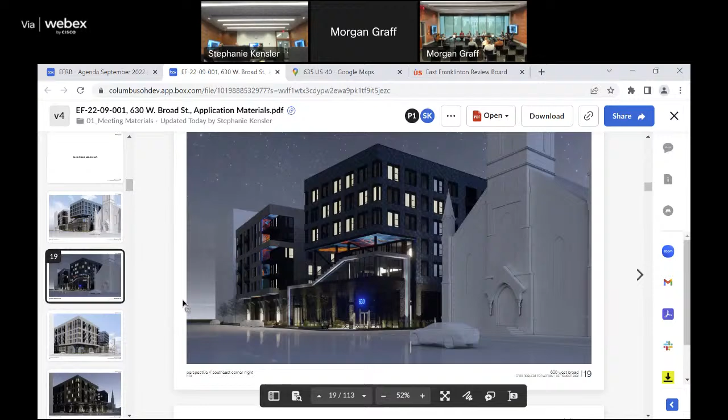The primary design changes to the application since the July 2022 review include varied the height of the parapet, added large format brick to the base of the building, increased mural opportunities for the garage screening, soffits, and balcony cuts along West Broad Street, added more balconies on the west facade, redesigned the southeast corner entry, adjusted the size of the townhomes and relocated balconies out of the right-of-way, and deepened the commercial spaces and the residential lobby.

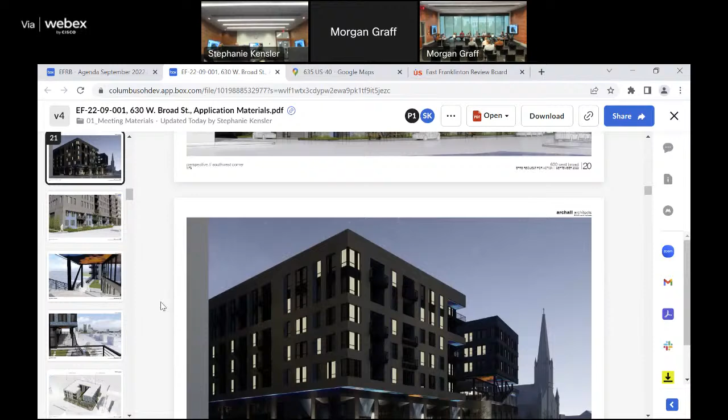The applicant will return to review and approval of landscaping, lighting, and signage and graphics. The submittal includes existing condition photos, site plans, floor plans, elevations, perspectives, and material information.

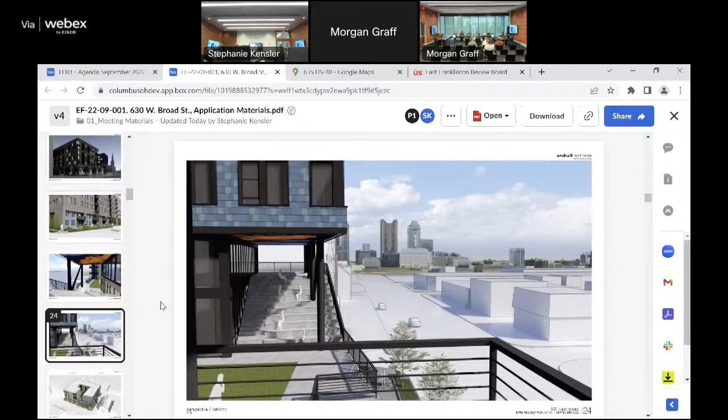The proposal is generally consistent with the East Franklinton Creative Community District Plan, and the uses are permitted. The plan suggests that a wide range of architectural styles are appropriate for East Franklinton, with a preference for contemporary building design and materials, and that new construction should be integrated into the surrounding neighborhood. The proposal is consistent with these guidelines.

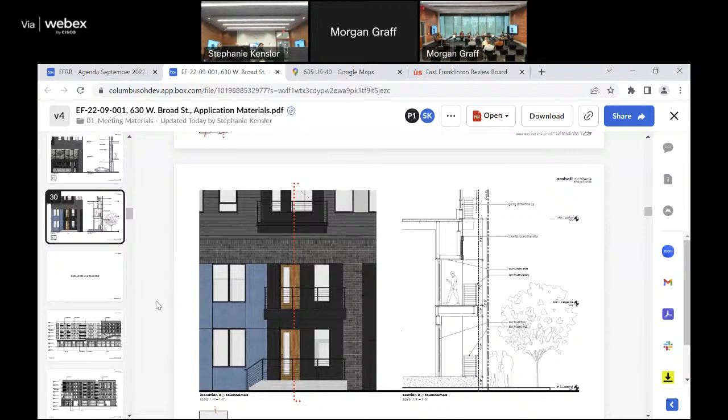The plan also recommends that buildings have a consistent level of detailing on all 4 sides and contribute to street activity. The proposal is generally consistent with this recommendation, with the exception of the North Grove Street elevation on the ground floor. Further, preservation of the existing buildings is encouraged where possible.

The applicant is proposing to demolish all of the buildings on site. However, staff notes that the buildings, while historic, are not eligible for a historic register due to being heavily modified over time. Finally, the plan recommends full height screening of all roof and ground mounted mechanical, which is not included at this time.

Staff is generally supportive of the proposal, but recommends the applicant incorporate additional activation along the North Grove Street frontage and ensure that all roof and ground mounted mechanical are screened according to the plan recommendations. If approved, the board would be approving the following code development standard modification.

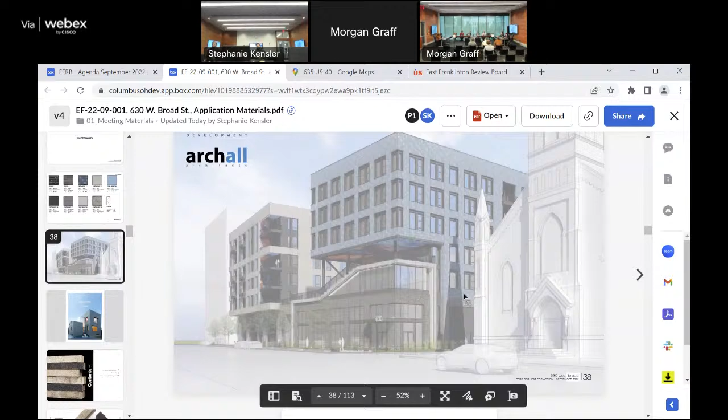A height modification to allow an increase in height from 60 foot to 88 foot 8 inches, an increase of 28 foot 8 inches. Staff's recommending conditional approval, with the conditions being the applicant to return for approval of landscaping and lighting, as well as incorporate additional activation along North Grove Street frontage and screening of the roof and ground mounted mechanical in accordance with the plan.

Thank you. Any questions for staff?

Hearing none, will the applicant step forward, please?

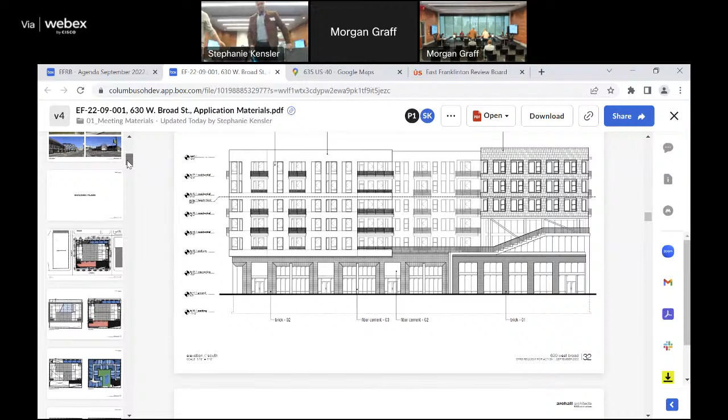State your names for the record. Grant Alvin. Brad Parrish. Do you swear or affirm that the testimony you're about to give is true and accurate to the best of your knowledge and belief? I do.

Proceed, the floor is yours.

So this is our fourth time with the group here. We've received great feedback along the way here, and we just want to continue to push the design for this area.

We focused heavily on this southeast corner here to really tie in that corner and that entry feature, which would be the main lobby space to the development.

You can also see by this initial render, we've added opportunities for graphics that we will come back and really show what they are. But we wanted to really activate multiple faces of the building vertically, the horizontal surfaces.

The materiality, I do have hard samples here of all the materials. Again, we're looking at a darker, black brick base on it, and all this materials in the back of your package. But I think the keynote material that we're looking to look at is this terracotta tile that comes in a different sort of shades of color and really gives a lot of texture and color to the building.

So this is a product that has been similar, if you're familiar with the White Castle corporate headquarters, the white, although this is just in color at this time. So it's a very high quality product. Again, I think all the materials that we have selected are high quality and give a project that can give longevity to the building facades.

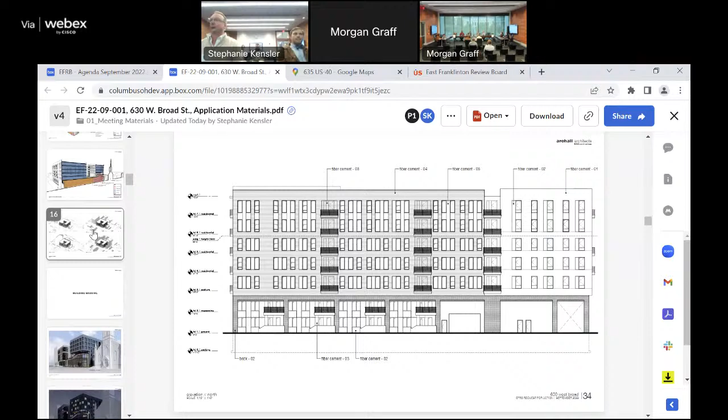So I think that's kind of a big picture highlight of what we've talked about. We showed the sun studies in version 2, as well as the 60-foot line showing that variance on our elevation. If you don't have further comments, I'll open it up to questions. All right, questions for the applicant?

So the other sun study, the winter one, I did not see that come through. They're both on there, on the same page—summer's on top and winter's on the bottom. Before you had all seasons. We had all seasons and then responded back. Not seasons, but months—it was all July but different times of day.

So the bottom is the winter. Again, my purpose for asking was related to the project we approved off of Gay Street, which hasn't come in for final authorization yet. Correct. I was hoping the rest of the board that wasn't part of that process would know there's a proposal there for a chapel and another building.

And again, related to the height increase—at the regulated 60 feet, there's going to be a shadow cast on that site because of the orientation of the building. If we approve more height, that's going to increase the shadow, especially in the winter. I wanted everyone to know that, because it's part of the decision making. You can see from 2 PM in the winter that facade is in shadow, so it will have an impact in the winter.

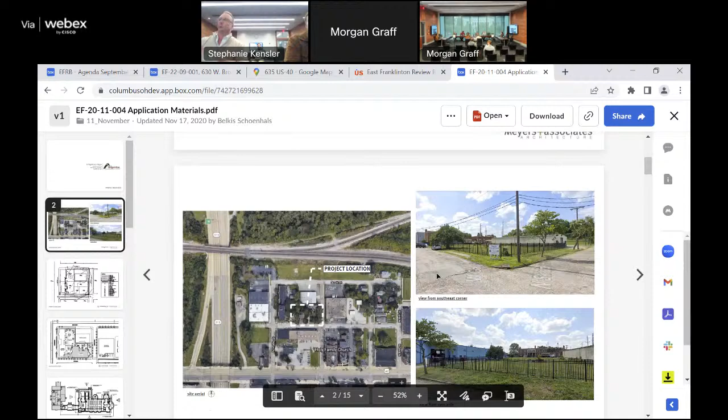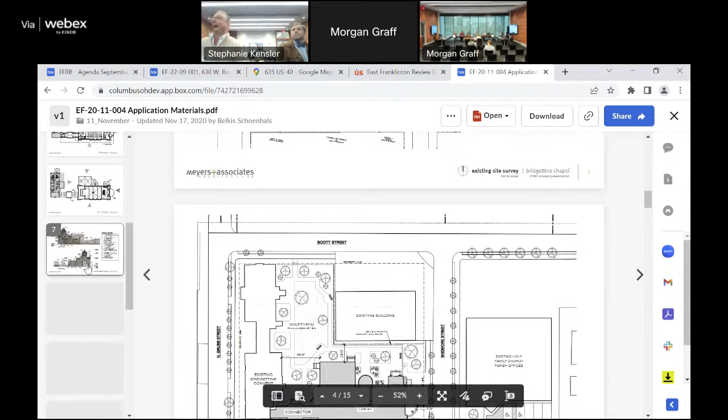Yeah, I like that gesture you did—I think that helps, that dialogue with that project. But I just want to be sensitive about increasing shadows because we may allow for increased height, and that's a decision we have to make. Again, this is an urban neighborhood—there's still going to be probably more tall buildings in East Franklinton, so just something to consider.

I had another question. Should we just keep rolling?

Let's keep rolling. So staff is recommending that you move the loading, unloading for people moving into the apartments further back. And you have it where it is because there's an elevator there, I assume. Yeah, there's the elevator, so that we can move in and out, and it gives direct street access.

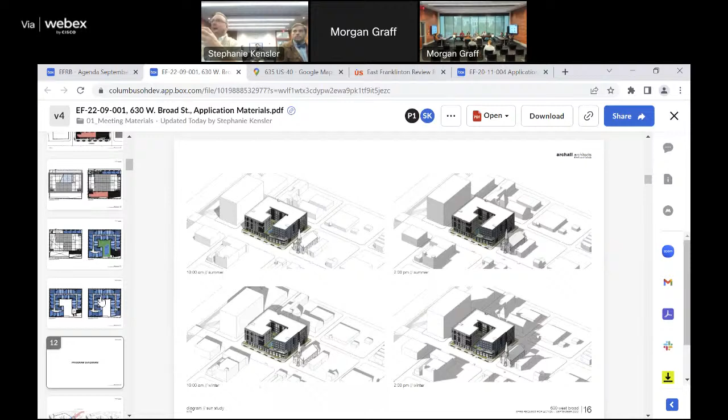Could you move the elevator back to the back corner and move that? We need an elevator that is also our main lobby, so we'd be kind of duplicating services there.

Right now we've split the elevator so that, from a tenant perspective, they don't have a long walk. They can go to one or two, there's 2 elevators in the project. One on the west wing and one on the east wing, down here in the corner.

It's really about trying to minimize the path of walking for a tenant parking in the garage. So if you didn't move the elevator and you moved the loading/unloading further back, that just means people have to roll their stuff further.

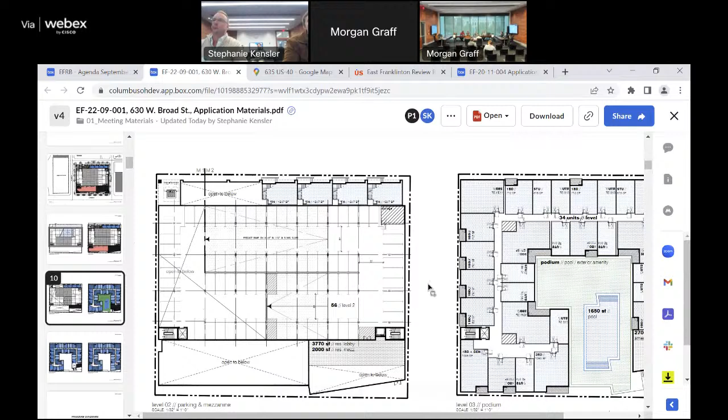We do a lot of multi-family developments here. It's like 30 to 40 minutes to unload a truck with couches and beds and all that. The closer we can get that, the faster that truck gets out of there, so we really try to minimize the number of steps a tenant has to incur in moving in.

I'm looking at this in very small size, but from that loading space, there's an opening in the garage, right, to get to the elevator? With a door, is that right? If you did move the space, could you still have a door into the parking garage and walk through the garage to the elevator? Or is that elevator only access from the lobby?

It's access from that lobby for the move-in. It's quasi-acting like a vestibule. So I guess, are we concerned that just sliding it—is there a distance you're looking to get away from Grubb and Broad Street?

I'm responding to staff's comments, and they want to activate more of Grubb on the corner, so they would actually want to activate space around the corner. I don't know if staff wants to provide any more details, like how far.

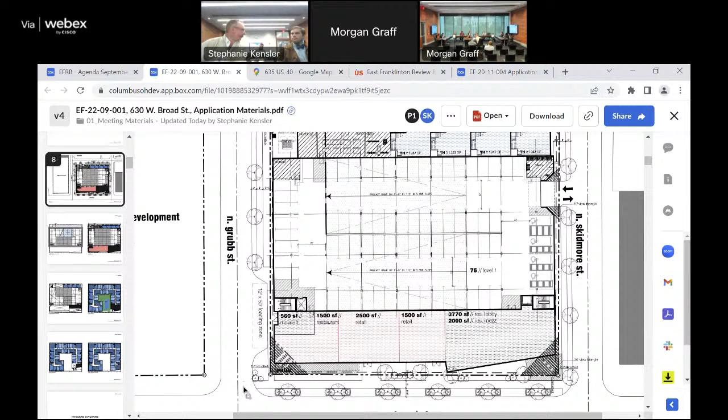I don't think we had a how far per se. One of the plan recommendations is about having parking, stacking, and circulation towards the rear, and this is at some level temporary parking. So we were thinking if that elevator and loading zone could scoot farther north on Grubb, that would allow the opportunity—even at minimum—to just have a door into that far bottom left restaurant, to activate that corner a little bit.

I think, hearing the dialogue here, if we took just the loading zone, kept the elevator and the stair there, and slipped the loading zone back so that the angled part of the front—at the hatching near the start of the stair area—got the first 70 feet from Broad Street to be actual curb area, I don't think that's an impact on the design.

And it would allow it to wrap more around the corner. Yeah, like I said, I don't think we had a specific depth in mind. Certainly the further you can scoot it without overly impacting the view line, the better.

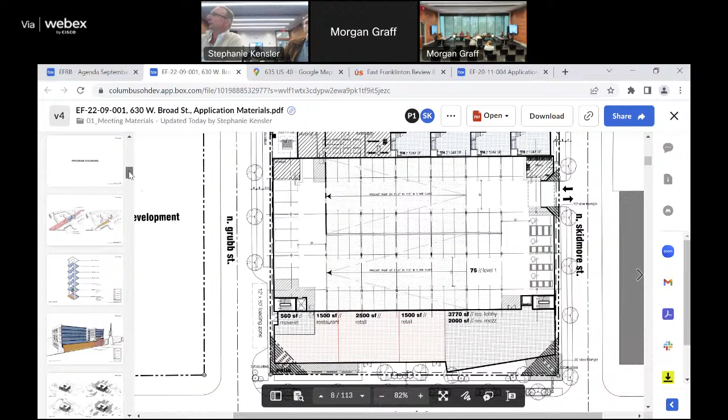There's really nothing active on your building on this side of Grubb besides people moving in and out, and you're going to have a building right next door to it, so anything we can do to activate this frontage. Our thought was if you could scoot that down, you could access that corner retail space from the corner and maybe have that patio space wrapped or something like that.

I think that would be acceptable, even where the fencing starts at the garage—most definitely we can have the loading zone pushed back. That's not an issue.

Great. I have one last question for now, I'll probably have others but they'll come up later. In your massing studies, the future building looks much taller than this building. So we should anticipate that you're going to be asking for even more height.

That's right, so that one's taking cues more from Gravity 2. We're just trying to keep that height in the corridor along Broad Street, but be more of a gateway building as you are coming east into downtown.

It's really that tall. It's been slated as a proposed concept for an office, potentially our new office. That being said, parking is going to be the big burden on that building itself, so the first couple floors are really just a garage, to get some efficiencies for that required parking.

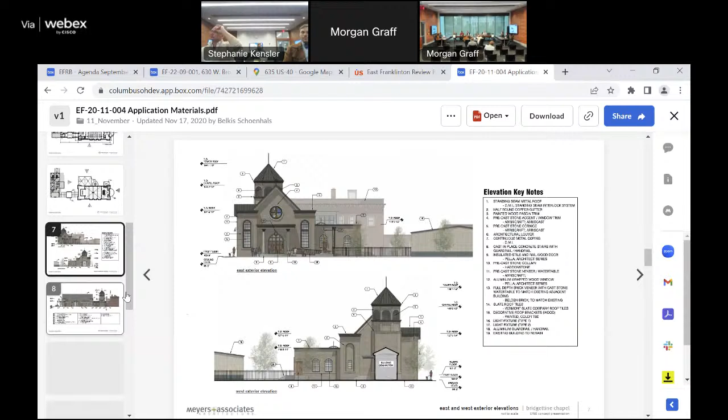Scott and Skidmore, north of the site? Yeah, so that was reviewed and approved. They have not returned for their COA yet. So in theory, that project could never happen. It's not like it's under construction. They put the brownstones across from it.

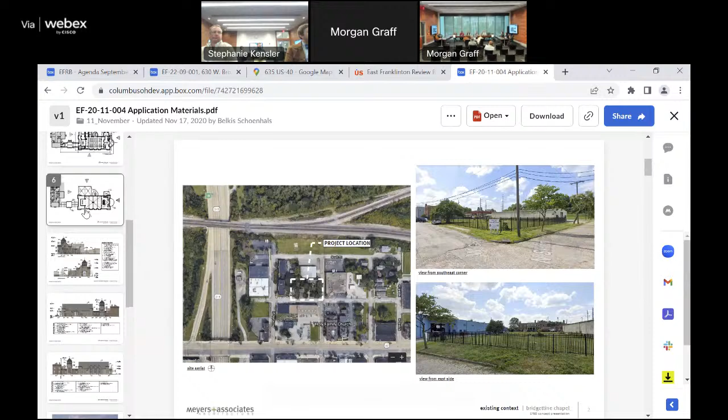Is the church, Holy Family, the developer or owner of this project? It's the Bridgettine sisters, that's the convent. I've heard about the convent for a long time. That's it, yeah, it's cool.

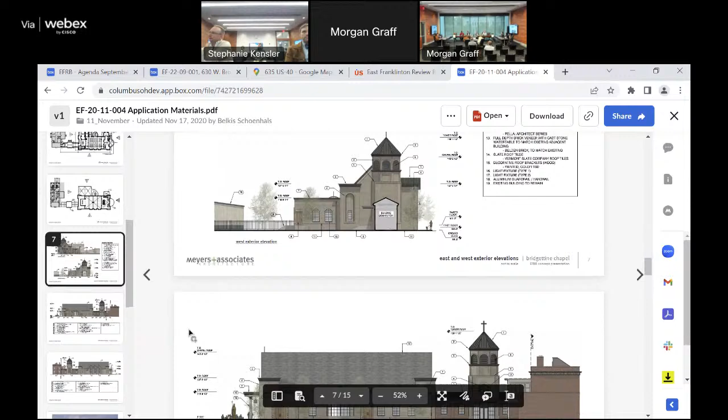And the garden spaces that they've planted, which are kind of further back, would probably be shadowed. That would be a big concern to me, but this building is right on the street, so it's not affecting outdoor spaces.

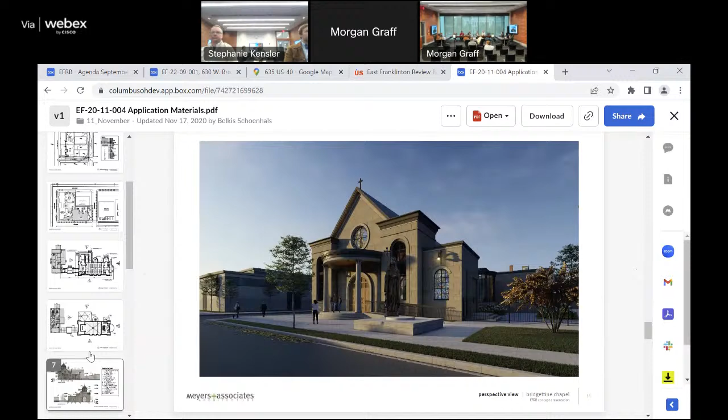Any other questions? I note that the rooftop mechanicals are not proposed to be screened. Do the architects want to weigh in on this? Staff's recommendation is that it be screened, most specifically because the building next to it is going to be taller, so it will be visible to someone, just maybe not from the right of way.

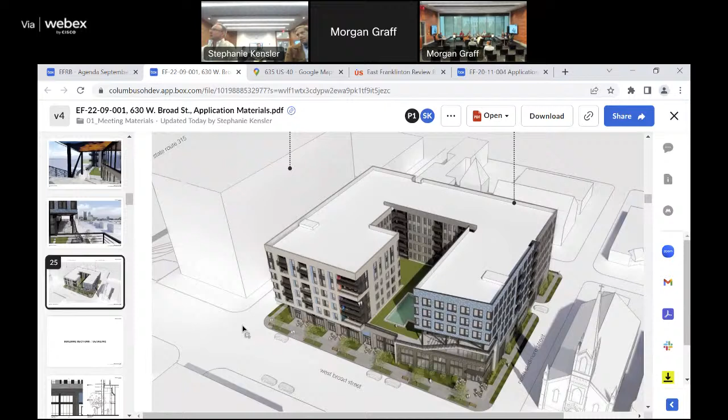Okay, gotcha. So what's the applicant's response to staff's recommendation to screen? We ultimately try to vary the parapets in the roof so that the vision — again, a 7 or whatever story building adjacent would have to do something a little bit more to respond to that comment. But the idea originally was that from ground level you wouldn't be able to see them, based on the parapets, which are historically 2 to 3 feet above the finished roof floor. So if the comment is about the roof, even if we screen them, you're still going to see down inside the screening. There's never really a cap on those because we have to keep air circulation for the condenser units up on the roof.

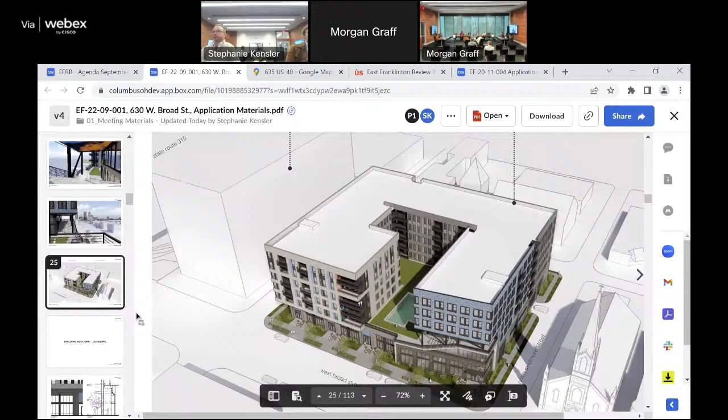Any other questions? I have a quick question, being new, just trying to understand — knowing that we do have a standard building height of 5 stories, is that just the recommendation? It sounds like we are approving outside of that. Yeah, so the plan and code recommendation for each area — Broad Street, the Arts and Innovation district, and Dodge Park — they're all different height limits.

The one along Broad Street is 5 stories, but EFRB is unique in that instead of an applicant having to go through the city variance process, the EFRB can actually grant the modification to height. So it's just a recommendation — in theory, if they were asking for 12 stories or 20 stories, the board has the authority to grant that request. The plan just talks about having the densest development in East Franklinton along West Broad, so that's why you see a lot of height variance requests on Broad Street.

And Gravity 3 has already gotten a variance for height, right? They did, yeah, I don't think it was quite this high. And Gravity 2 obviously is much taller — yeah, they got 10 stories. It's tall, but I don't know what the limit is there. Is that the same one, just across? I should know that. Keep reading — I have a question.

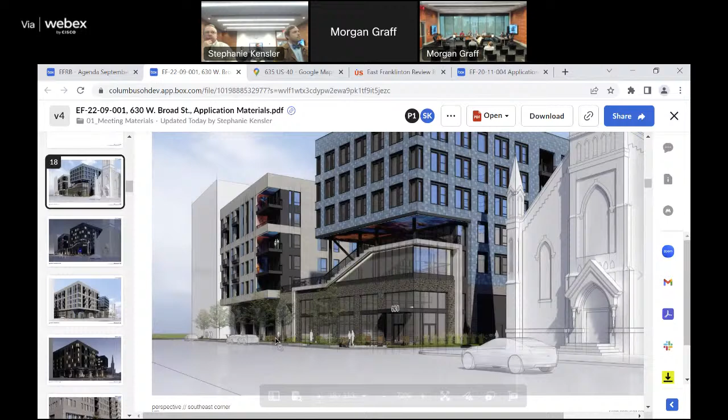I'm just wondering if there's a way to do it without having it stick out so far. Because I think the western half of the building that's set back on the first floor, that's good, but people on that portion of the sidewalk, their view's probably gonna be blocked by that little notch to the church.

Yeah, I guess it's a relationship of the massing above and sort of bringing that down and then extruding it out, really starting to isolate what is considered the lobby amenity to the residential. That's kind of a clear break between that angle portion as a tenant, and then the retail tenants occur back, so that again provides sort of a setback from the right of way for patio space, and all that is kind of protected in itself. So there were multiple moves in just that one gesture that we were trying to do.

Have you done any angled vision studies about what the view of the church would be from the western corner of the building, that sidewalk there? So if you're sitting at a patio, would you be able to see the church facade?

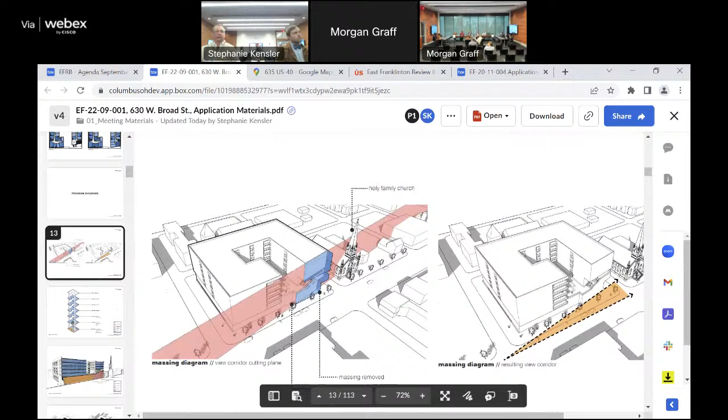I would say, I mean, if the massing itself, no, we have not studied that. If you're sitting in a patio seat looking down, you would just be looking at the front facade. I think the beauty of the steeple and all that is really the height and the sort of 3/4 view. If you're sitting in the same plane as that, you wouldn't get it anyway.

It's really in the street view of really having that 3/4 view of the church that is the power of that elevation, not just a flat facade elevation when you're staring straight down the line. Yeah, I was paying close attention to that on the drive over here. I think in the street, we're good to go. But yeah, from a pedestrian standpoint on that north sidewalk on Broad, you really have to be right upon the development before you would see it. Yeah, I don't think even if the facade was flat on the front, you would have that view or be able to really see the church anyway.

And I think this really starts to respond to the massing and the split in that elevation, where that exterior steps and really responds to opening up to the steeple, was really a move that we wanted to do. It's kind of all responding into the map. I don't know, I know I'm not fully answering the question, I'm just...

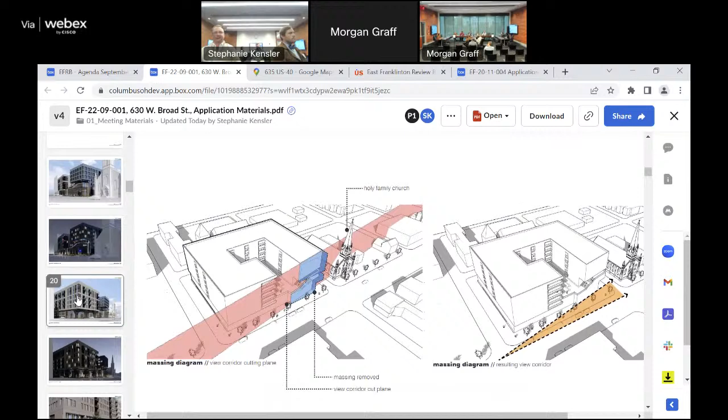This view is like if you're heading eastbound, which is exactly what we wanted, but if you're sitting on the patio, you probably would not see it. This looks great, but this is from the far south corner. If you were across the street on the north corner, you probably wouldn't see the church at all. But I would think that any development with a straight facade across it would be difficult to see that as well.

Is the parking for residents only, or is it open to the public? The parking for this building is residential, and secured parking as well.

Any further questions? If not, let's move to the staff recommended conditions board and see if we all agree with this: the applicant is to return for approval of landscaping and lighting, as well as incorporate additional activation along the North Grove Street frontage, and screening of roof and ground mounted mechanicals in accordance with plan guidelines. Is there any element of that that we disagree with?

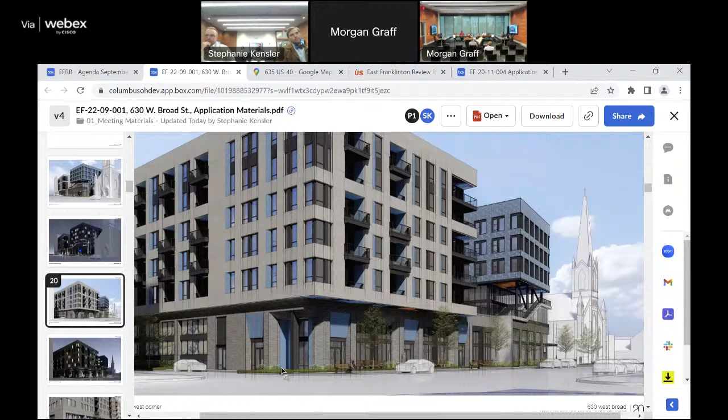Sounds like there's not. In that case, I would entertain a motion.

Go ahead, motion. Go ahead. We'll see. Yeah, I'm there with you now, Bill.

I'd motion to approve based on the staff report, that they come back for that review and that they meet the staff recommended conditions.

Well, one was the rooftop units. Did we address that? If you want screening above, that's gonna be difficult because of the mechanical circulation. We just meant screening around, just make it a little better. I understand you can't put it over — we isolate those mechanicals anyway to be along the hallway corridors. They will be even further in, so they're not above a unit themselves, for vibration with the units, so the tenants can't hear them.

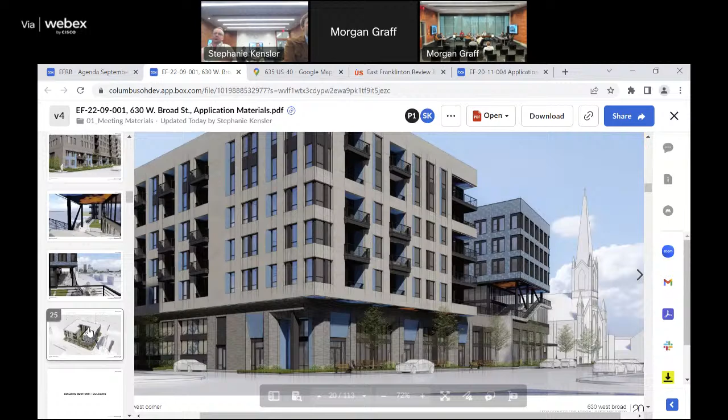But staff's comment was about the view from the taller building, right? So they're looking for more screening than just the parapet edge, since they're worried about the future. If there was some type of more decorative fencing or something around it, yes, you're gonna see into it, but it's better than seeing the whole thing — that was our perspective, but you all can do with that recommendation what you will. I was just looking at a building on the Georgia Tech campus that has exactly what staff's recommending — every unit has a little screen around it, and you still see the top of the unit. So it's kind of like an attempt at screening, but it's still not really screening. I'd be okay with that — we were the architect of record for the Gravity One project, and there was no screening on that project, and now with the Gravity Two tall tower, you can see those as well.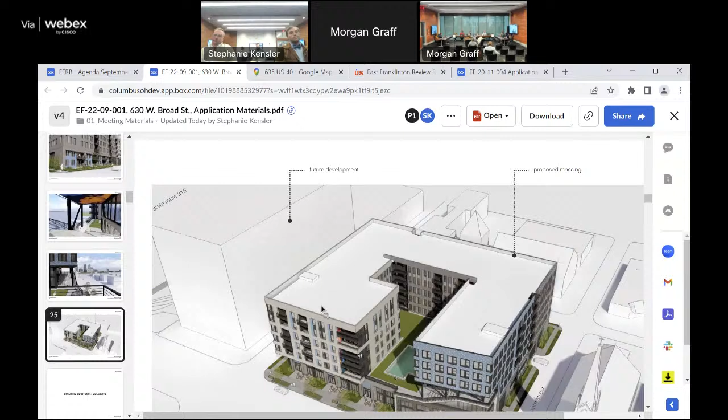So does everyone agree with that? Okay, so we'll withdraw that particular condition. Let me read back what I think I've heard — it has been moved, has been seconded, that we approve the application upon the conditions recommended in the staff report, except for screening of the roof mounted mechanicals. Correct? Do I have a second?

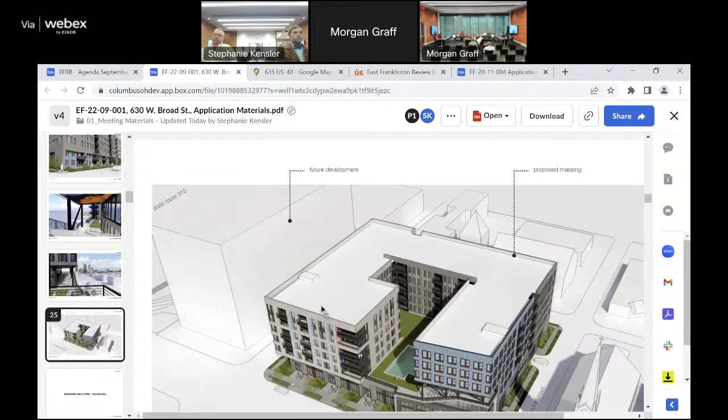Before we do the part about the loading area, I think we need to add that in. That sounded like the activation condition. Is that covered? That's excluded in that — that's ground mounted mechanicals. Okay.

We have a second. Mr. Sweeney has seconded. So I have a motion by Mr. Bush, seconded by Mr. Sweeney, to conditionally approve the application, subject to the conditions in the staff report, with the exception of screening the roof mounted mechanical. Is that correct? And it's building height separate — if you approve this, that covers the increased building height. Okay, call the roll, please.

Mr. Fergus, Approve. Mr. White, Approve. Mr. Bush, Approve. Mr. Nobby, Approve. Ms. Benner, Approve. Mr. Sweeney, Approve. Ms. Hamilton, Approved. Motion carries.

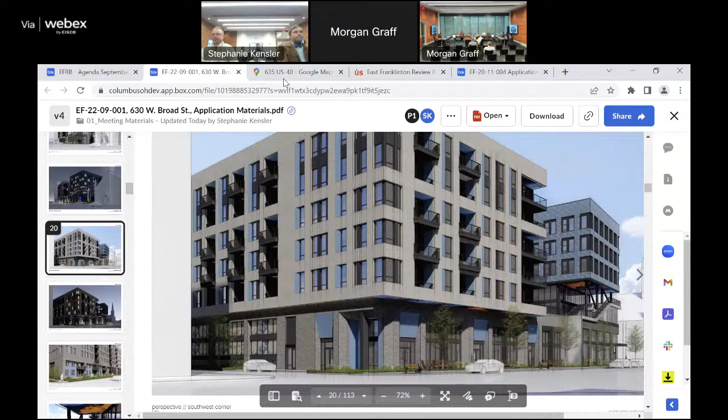Thank you, thank you for your time, appreciate it. Since you all will come back for lighting and landscaping, we can just address the conditions of the Broad Street activation and the screening at that time.